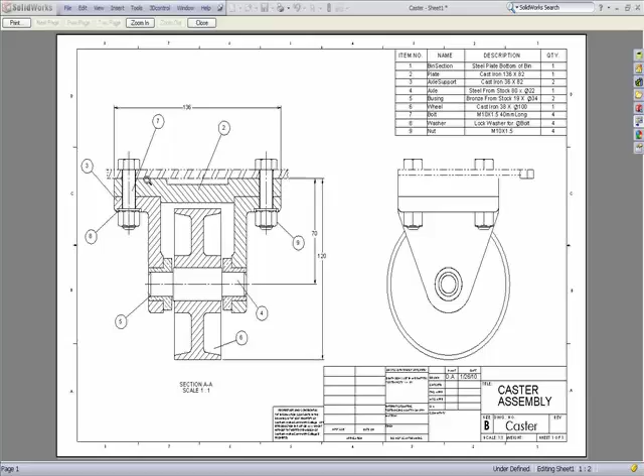In this video, I'm going to show you how to create a drawing from the assembly of the caster that you've put together. What we're looking for is a drawing that looks like this. We're going to have a full section assembly drawing. We're going to have balloons indicating the various parts. There'll be a bill of materials. You can see that up here.

There'll be a plate attached to the caster, and that plate will be shown in phantom lines. All the other line types should be correct. The line weights should be correct. The one thing that we are not going to be able to do using SolidWorks that complies with conventional drafting standards is to represent this hex-headed fastener right here properly in both the front view and the right side view.

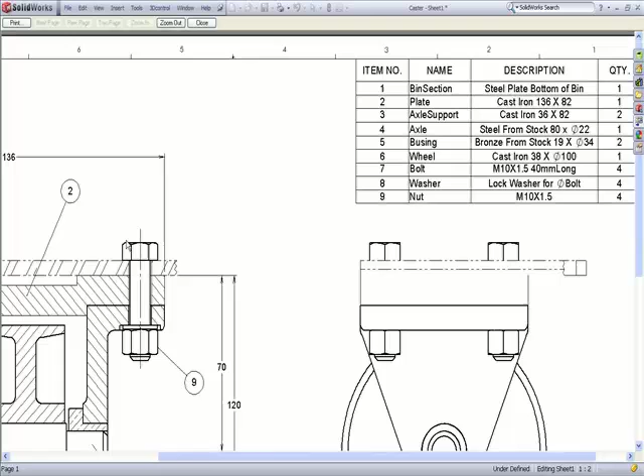Since it's an actual view of a fastener, only the front view will show the true symbol for a hex-headed fastener. This is the assembly shown in an assembly file with the individual parts, and you can see that they've been placed in there with different colors, which I'd recommend so you can separate them. You don't have to open this in order to create a drawing, but it's one way to do it.

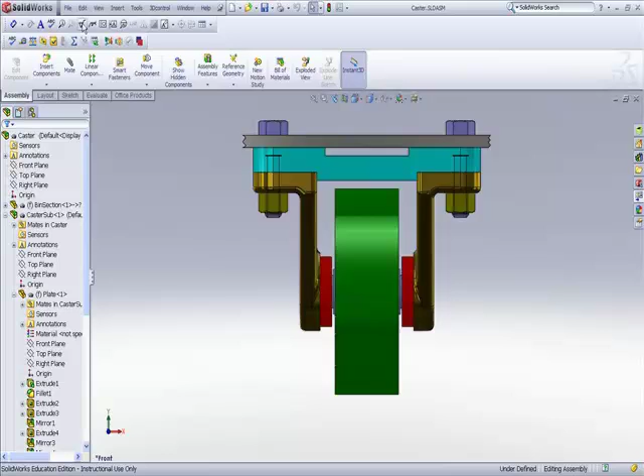So what I'm going to do is, with the assembly open, I'm going to go to the File pull-down menu, and I'm going to go to the Make Drawing from Assembly button, and that will open up. Now I've already got a drawing file because I've done this a couple of times. I'm going to open up a blank sheet instead. Now, because I've chosen B size as my default sheet size, it opens up automatically. I get a little palette on the right hand side that shows me my various views.

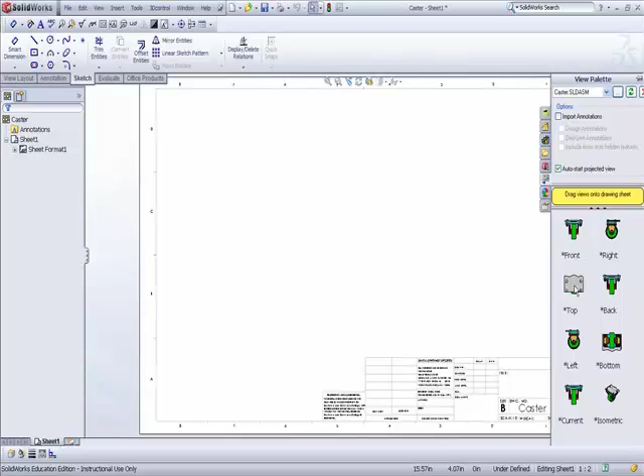I'd like to start not with a front view, but with a top view, because in order to do a section, you need to show the view that the cutting plane line goes through. Once we have the top view in place, we'll just stop, because at this point, we're going to put a section view on here. Now, in order to do the section view, we have to do a couple of things.

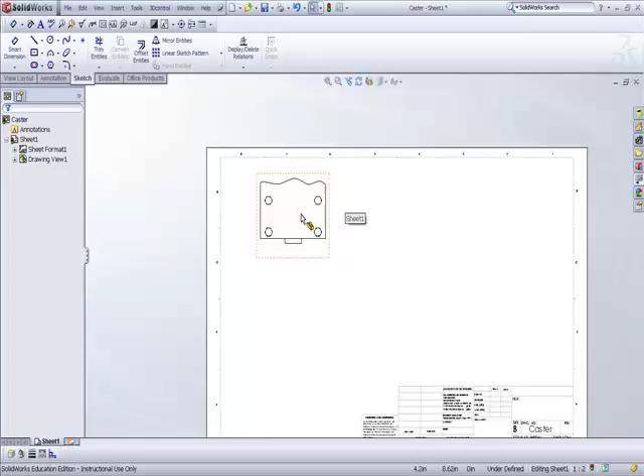The first, because I really don't want this view as part of my drawing, is I'm taking that view and I'm just going to move it off the sheet itself, which might seem a little odd, but I'm really using it as a source for the front view. And then I need to indicate where the cutting plane lines are going to be.

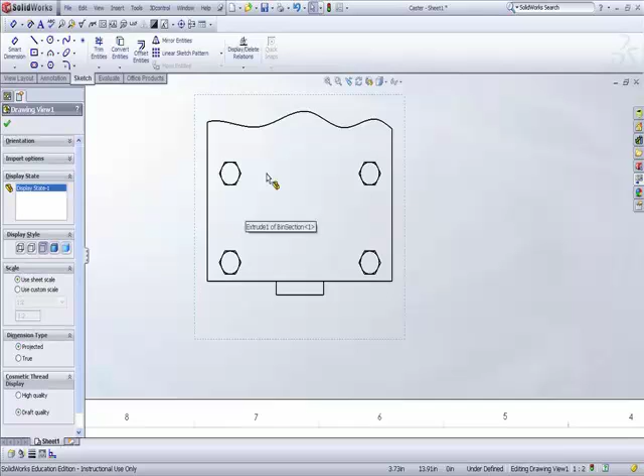By drafting convention, a full section through an assembly generally moves fasteners into the plane for the cut, even though they aren't physically there, just for clarity. In SolidWorks, we can't put a full section through here and say move those. What we have to do instead is what's really known as an offset section. We have to start that offset section by drawing a line. The line is going to be the representation of the cutting plane line. I'm going to start it here and come out through and then come back.

In order to see what's going on below, I'm going to switch my display style over here on the left from the solid display to the hidden display. A little bit confusing, but you can see all of our parts there. Now I'm going to go to the sketch option. I'm going to sketch a line. I'll track off the center of this fastener. Start the line here. Just go past the fastener a little bit.

Come down and find a midpoint that I can track from. See, I've got that midpoint now. Come through it. Go just past it here. Move up. Highlight over the center, track off of that. Once I've tracked off of that, come across here, and that indicates where that cut line is going to be.

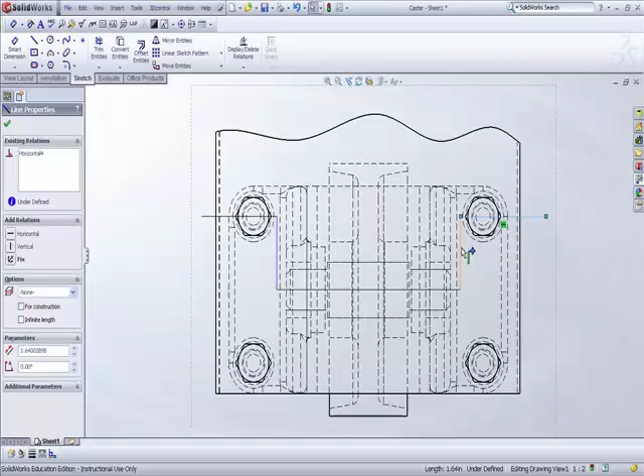Now, I need to select those lines. Hold the Control key down, select each one of the lines so that they're selected as a group. So the whole point of the Control key is just to hang on to be able to get all the lines, and you'll notice they're all listed over here. Once they're listed, we go up here, View Layout, and we want to pick section view.

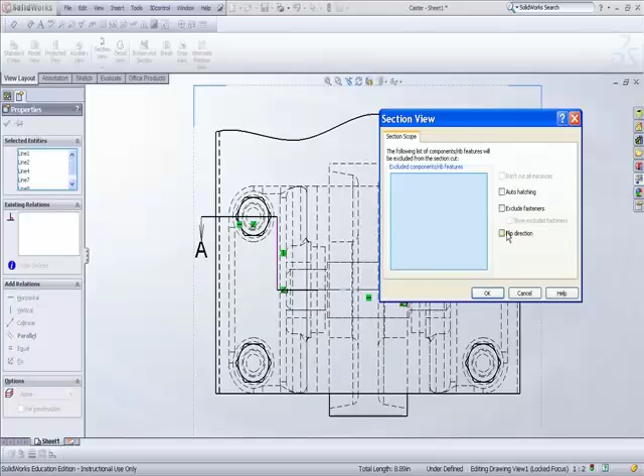You notice that the arrows are pointing down. We don't want them to go down, we want them to go up. And because it's a full section and you don't section fasteners and you don't section things like shafts, we're going to go into this Exclude Components window and we're going to start picking things to exclude.

First thing I'm going to exclude is the bolt. The next thing I'm going to exclude is the washer that's under the bolt. And there's a nut down there I'd like to exclude, but I can't reach it from this view, so I'm going to wait until later and add it.

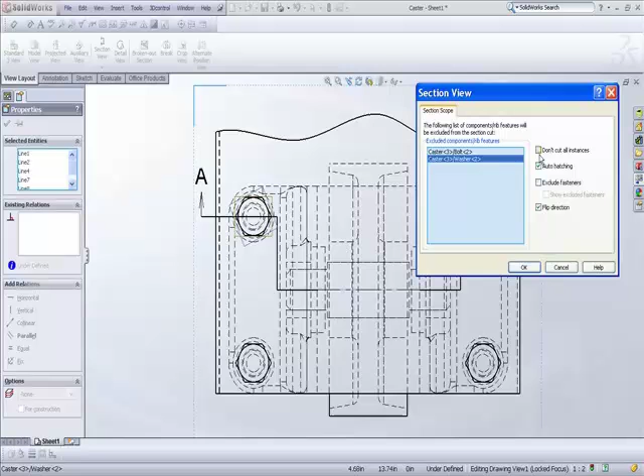We'll do auto hatching, which is going to help us a little bit with the hatching that's put in. We can't exclude fasteners because these fasteners were not added as actual fasteners, they were added as individual parts. And we'll do a don't cut all instances, but not yet. We'll get to that in just a second. Pick OK, zoom back out, and I'm just going to bring that view down here and put it in the center.

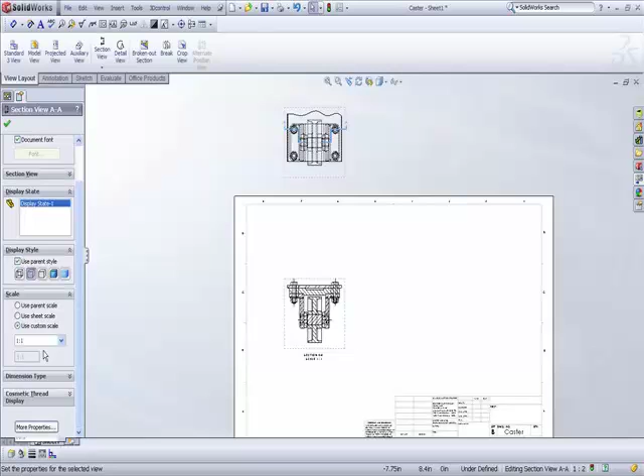Now I'd like to use the sheet a little more effectively, so I'm going to take this view, bring it down, and I'm going to change the scale. I'm going to select the view, go over to the left panel again. I come down to the scale window. It says Use Parent Scale. Well, parent scale means the scale set for the sheet, which happened to be 1 to 2. I'm going to change that to Custom Scale, change it to 1 to 1, and you'll notice just for that view it's shown as 1 to 1.

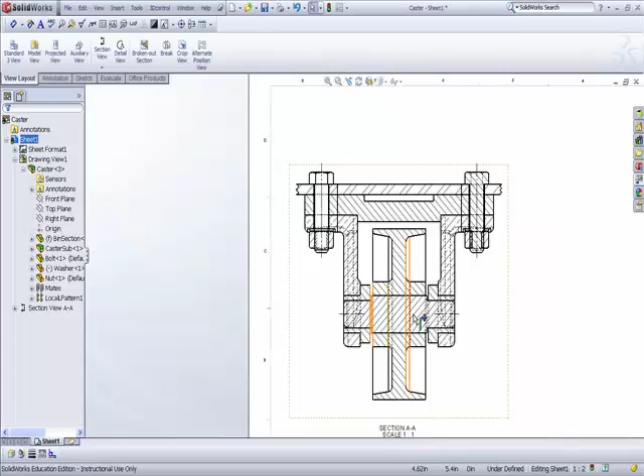Now, we zoom in a little bit and you can see that my bolt is not sectioned, the nut is sectioned, the washer is not sectioned, and I neglected to take the axle out of this picture. So what I need to do is to add those things. Before I do that though, I'm going to pick that view, change back to solid so that it begins to look a little better.

Convention is not to section that axle, so we're going to take it out of the picture. Once we have the section view, in order to do that and remove elements, we need to select the view, right click, and then pick properties. One of the properties we can change is section scope. Highlight the area now, and now I can go in and select the axle. You can see that it's caster sub and then axle.

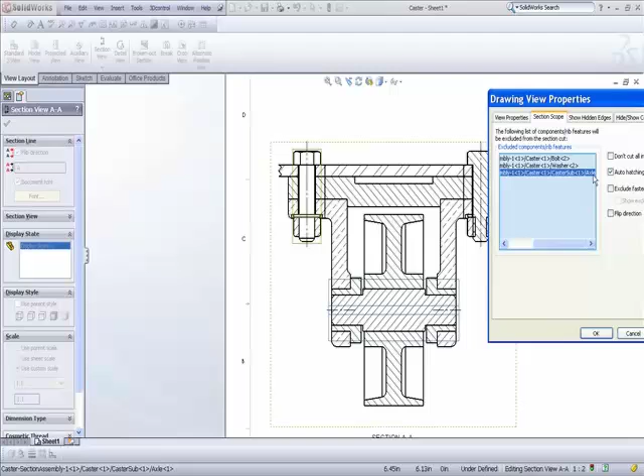And I'm going to select that nut right there, and I'm saying don't cut for all instances on the nut, don't cut for all instances on that nut. Pick OK, and you can see we're starting to get a little closer, although apparently I forgot to pick that bolt too. So let's go back in, properties, section scope, and we'll add that bolt in as well. So now we're beginning to get a little closer to what an actual section would look.

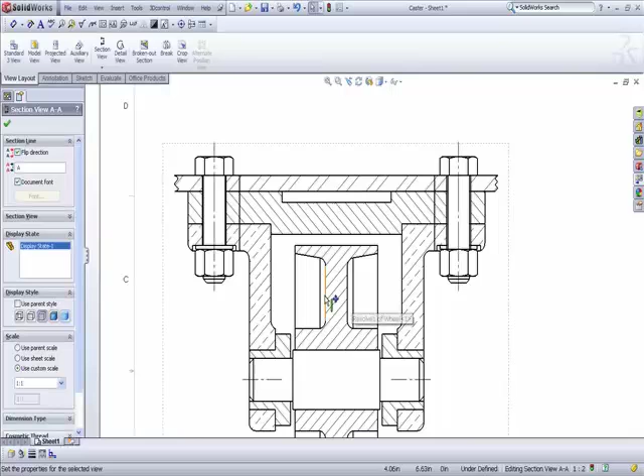A couple things we need to do here before we start dealing with the section lines themselves. And one of them is to eliminate these tangent lines. By default, SolidWorks will display tangent lines. We don't want to see them, so we right click on the view, tangent edge is removed. So now it cleans that part up for us.

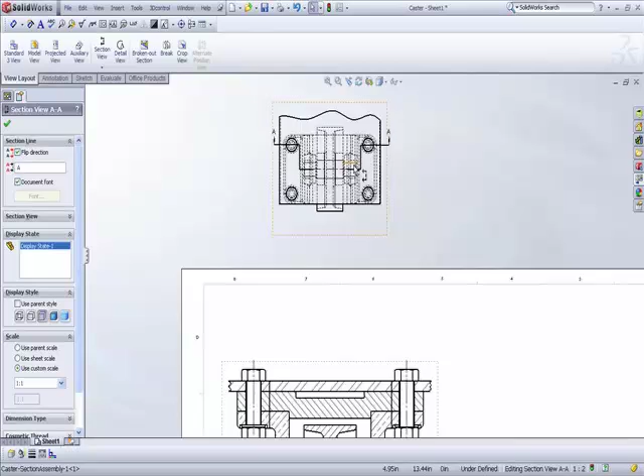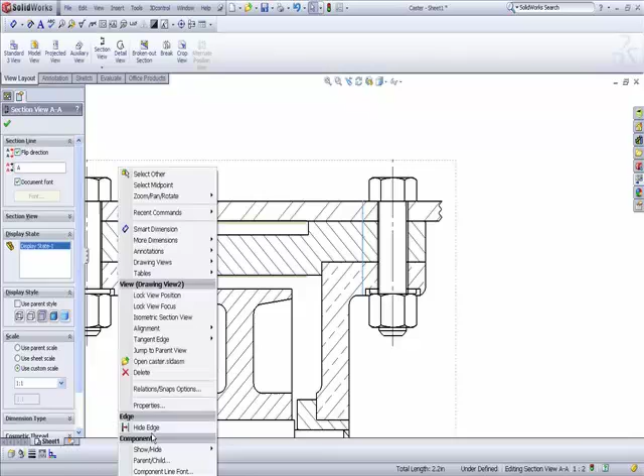The other thing we don't want to see is these lines right here, and those lines are actually the corners of our cutting plane. It's projecting those corners down right there. Well, we don't want to see those corners in a section view because they don't actually exist. So hold the control key down, grab each one of those lines, come over here and grab each one of these lines, and then I'm going to right click on the line, and we'll go down and pick hide edge. Now those edges are out of the way and we're getting a little bit closer.

Notice that I neglected to pick that washer there as well. Let's right click, go to properties, section scope, and then we're going to go in and grab the washer and put it in place as well. Don't cut all instances. Now that washer looks pretty good.

Now take a look at the section lines. Section lines are correct for this top plate, that's steel. They're correct for that plate, which is cast iron, but they're not correct for the axle supports because the symbol shown is the bronze symbol. They're also not correct for the bushings because the bushings are bronze and need the bronze symbol.

The other thing is, you notice that the angle for both axle supports is in the same direction, which is improper because they are two separate parts. This would imply that there is one component that has been sectioned and is connected in some way, like it may be the cylinder walls from something that continues all the way around.

So we need to change the angles here. We need to change the type of section line as well. And to do that, I'm going to select the section, come over to the left-hand side. What we can do over here is to clear the material crosshatch. In other words, we're going to clear what the defaults are.

And we'll use a hatch pattern, but instead of bronze and brass in this case, we'll go up and pick ANSI 31, which is a standard iron section line. And we'll leave that one at the angle that it's set for, and then come to the other side, pick that one, do the same thing, where we change the pattern to ANSI 31. But I'm also going to change the angle to 90 degrees, so it goes in the other direction.

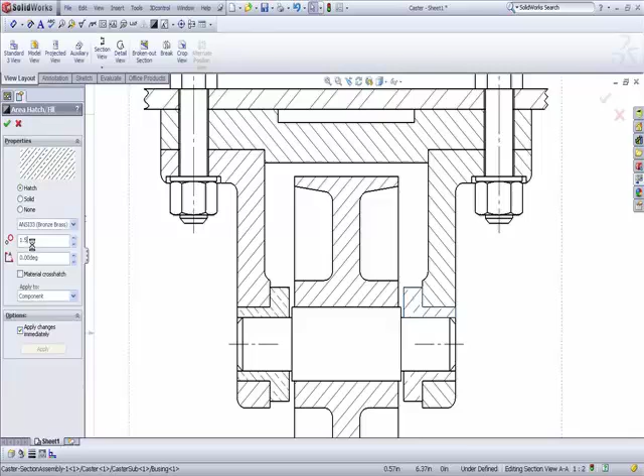Press the Enter key. And then let's go back over here. We'll do the same thing on this side just to make them consistent. So now they're both 1.5. They go in the right direction. If you look at the plate, though, the plate actually has these lining up directly with the axle support, and they can't do that. Otherwise, it appears to be the same parts.

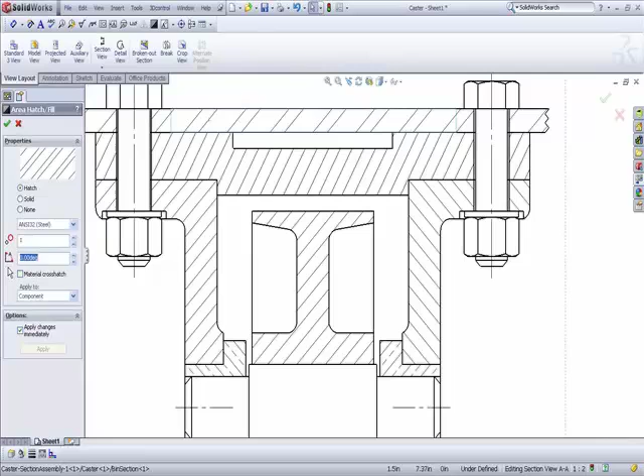We'll make a change to that one as well, and the only change we'll make here will be the angle. I'm just going to set that to 15 degrees just to shift it a little bit. Once I've shifted that way, I'm going to grab this one up here, and I think I'm going to switch that one to 90 degrees so that it goes in the opposite direction. It's already set up for steel, so we're all set there.

I'll do one more thing in this video, which is change these lines to phantom lines, and then I'll create a separate video showing you how to do the bill of materials. In order to change these to phantom line, I'm going to select that line, hold the Control key down, select this line, right click, and I'm going down here to the component line font. Now these are called fonts in SolidWorks as opposed to line types.

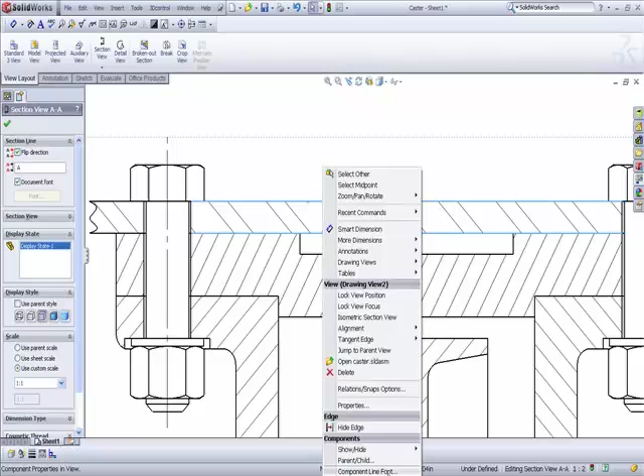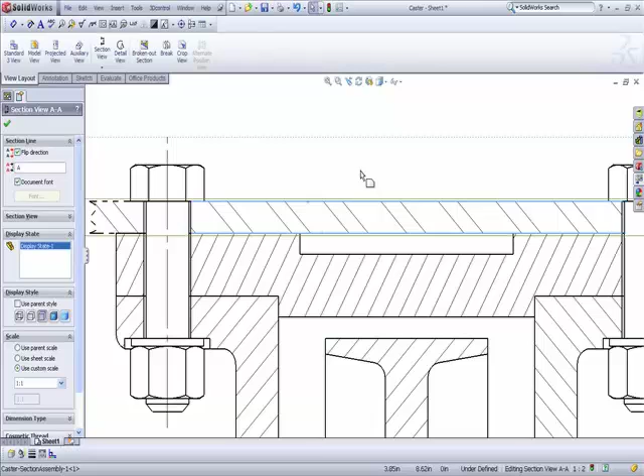But what we're going to do over here is instead of using document defaults, I am going to, for those two edges, make them phantom lines, and I'm going to change the line thickness to 0.09. Okay, come back out. What you'll see is we've got now a phantom line. Phantom line could be a little bit thicker, and that's because actually that's pretty good thickness, but what we need to do is to change the visible lines so they're a little bit thicker.

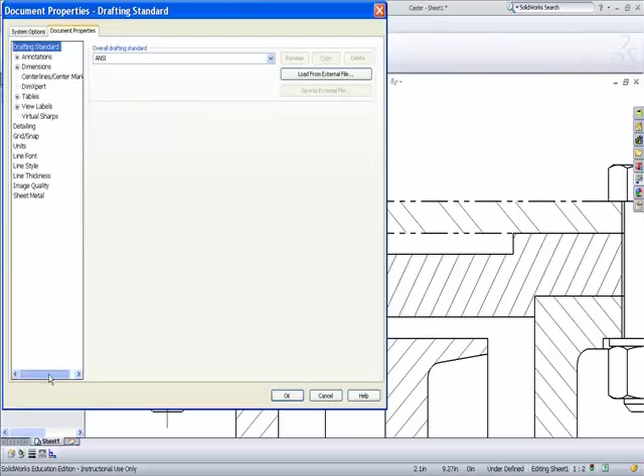Change the visible lines. I'm going to change the document properties. To do the document properties, you need to go to Tools, Options, Document Properties, and we're going to change the line font for the entire document so that all visible edges, instead of being 0.009 inches, we're going to change it to 0.027 inches, which is approximately 0.7 millimeters. We come out now and you can see that we've got fairly thick line weights. Possibly a little too thick.

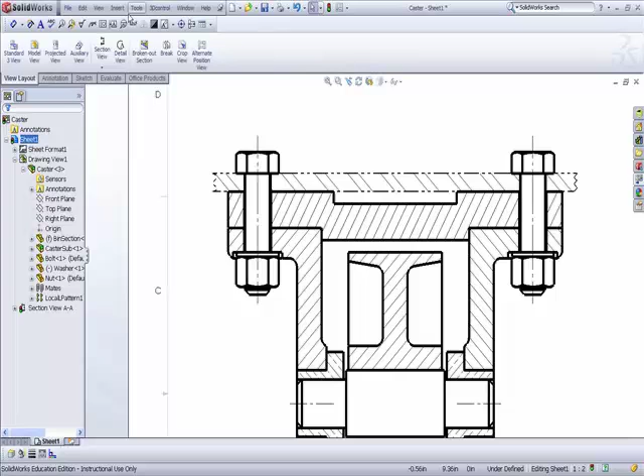We'll maybe make one more change to that. I'll get them a little bit thinner. And so what I've done here is change them to 0.5. I made them a little too thick before. That'll be it for this video, and what I'll do is make a second video that talks about the bill of materials and how to make the balloons.